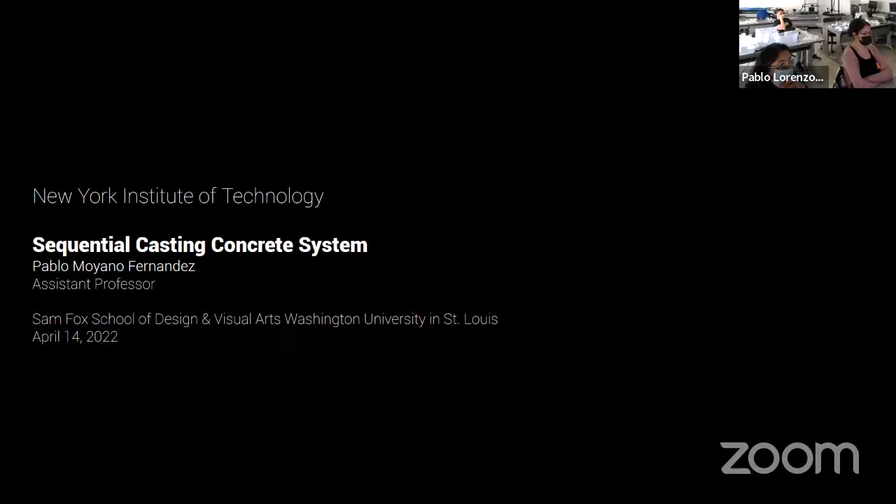We'll discuss that later, but thank you for being with us, and the floor is yours. Great, well, thank you, Pablo, for such a long introduction. Well, I'm very happy to be here. I'm very excited to share my work.

Well, as Pablo already mentioned, I am very fascinated by concrete. It's the focus of my research.

The idea of this lecture, given the time we have, is to show you what I've been working on during the last year. It's only one research project, but it has multiple applications in my opinion. Hopefully you guys enjoy the presentation.

What you see on the screen is the Performative Concrete Hub. This is a website I recently developed, a platform that consolidates my teaching and research. It's a dissemination tool that showcases applications and possibilities of concrete as a versatile construction material in experimental but also real projects. The matrix on the screen represents the inextricable connection between my research, my practice, and my teaching.

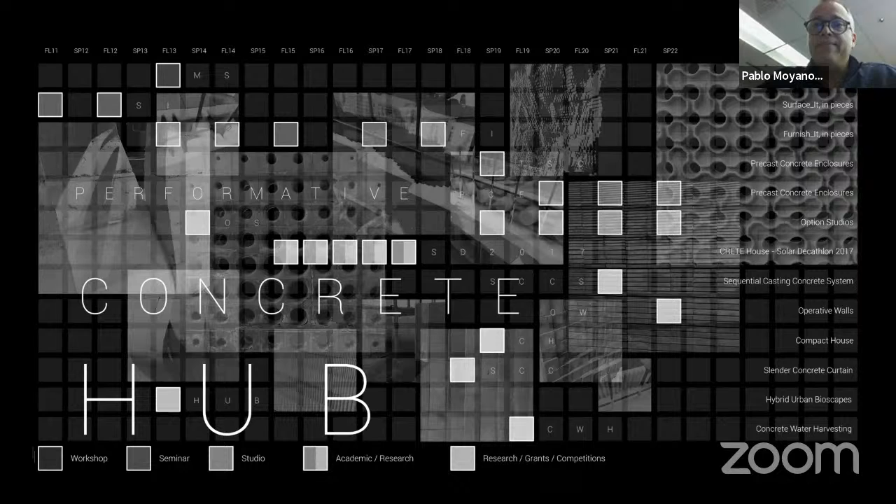In the last century, building technology has witnessed increased innovation in materials and assembly methods. With the emergence of digital fabrication technologies, architecture as a discipline, and the whole construction industry in general, has greatly broadened its options in terms of the materialization of building assemblies. The availability of a robust digital platform provides designers with a new set of tools that can enhance their creativity and potentially increase the complexity of building components.

All this is really exciting. Now, while digital fabrication tools can offer appealing construction methods, those methods usually rely on labor-intensive processes to set up the equipment, assemble components, and finish the final pieces. Consequently, there is usually a wide gap between the assemblage process required by digital technologies and the methodologies effectively adopted by the building industry.

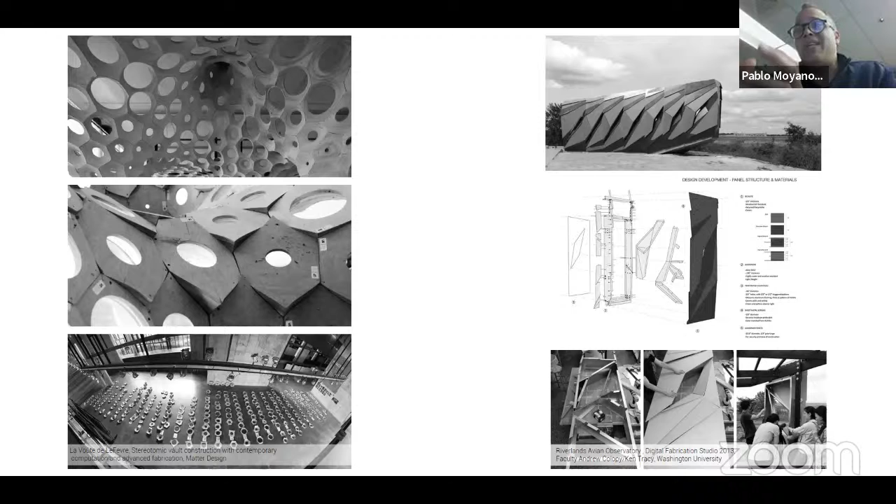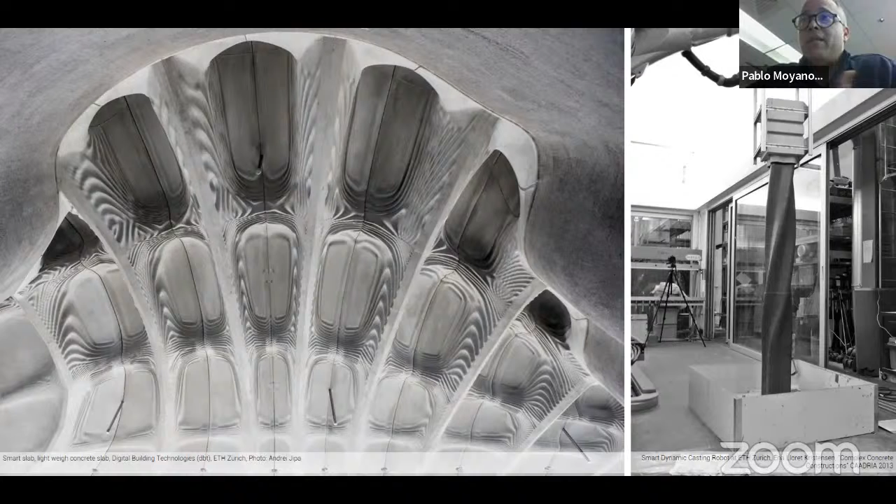However, in the case of concrete, there is fertile ground for exploration in terms of digital technologies applicable to formwork making, and its impact on casting methods. Concrete's reliance on formwork, due to the unique property of the material changing state from fluid to solid, brings the idea of a mold really to the forefront of the possibilities this material offers. And this is precisely where the focus of my research is.

I have been testing methods to integrate new technologies into the production of formwork making techniques. I am particularly interested in exploring the performative qualities of concrete in building envelope systems using innovative methods of fabrication connected to material innovation, in particular in concrete.

Concrete, as we all know, is a widespread material worldwide. It is used in countless applications and is specifically prominent in building structures and infrastructure projects such as highways, bridges, and many other large-scale projects.

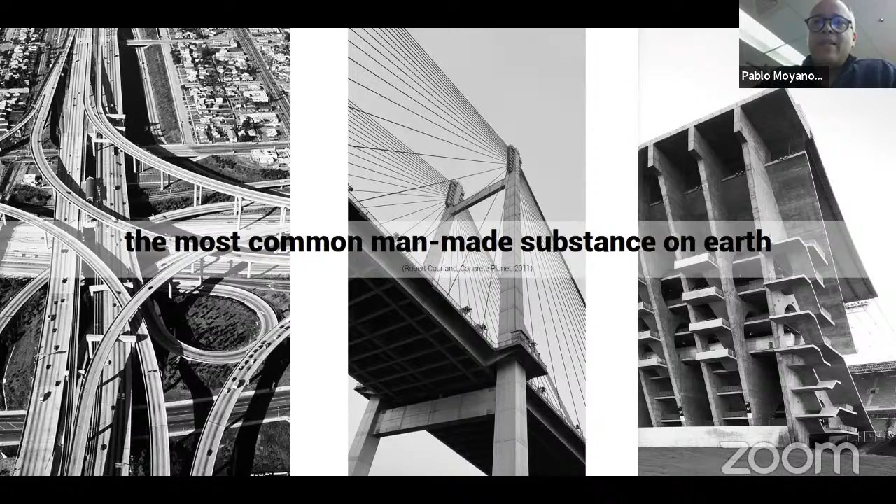Now, concrete's intrinsic properties, when coupled with new advancements in material capabilities, have increasingly enabled the use of that material in building envelopes.

Concrete is considered by some historians one of the oldest building materials. As you know, it was frequently used by the Romans many years ago. The Dome of the Pantheon, built more than 2,000 years ago, is an eloquent testimony of the architectural possibilities, as well as reliable evidence of the longevity and strength of the material.

However, somehow after the fall of the Roman Empire, the material virtually vanished. Two French theorists, Rondelet and Bourgain, in their construction treatises in the early 1800s, describe the methods used by the Romans and question why modern architects would neglect the use of such a cheap and efficient system as concrete offered back then.

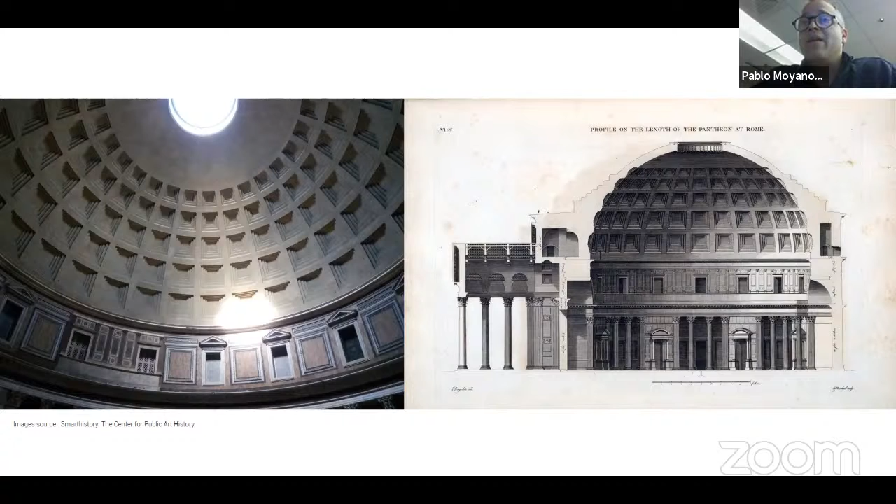When concrete came back into use as a building material, it evolved from a rather humble origin called pisé construction. Although the use of mud dates back to original civilizations, the technique was extensively used in Spain since Roman times, but also in France in the Lyon area in the 1700s.

The system consisted of ramming packed earth between movable formwork. The formwork consisted of a parallel set of boards which slid between vertical posts. The boards were raised once the earth was compacted and the process repeated.

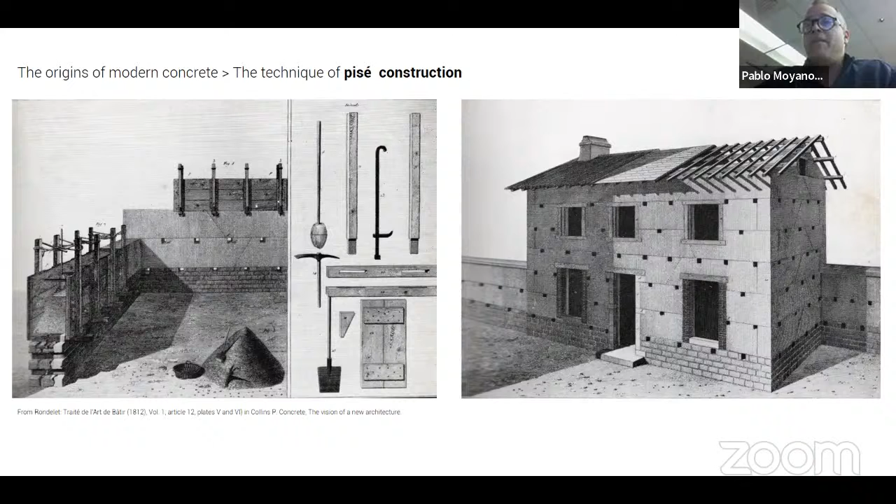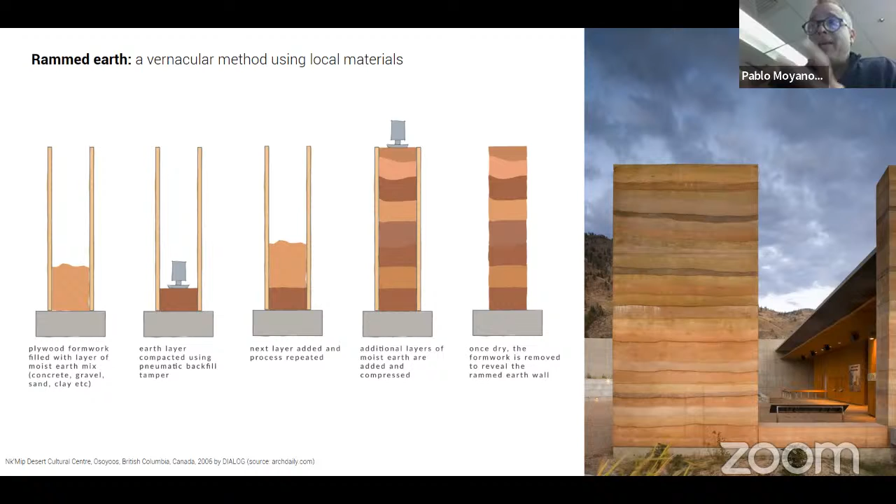Rammed earth is one of the oldest construction techniques done by civilization. Making rammed earth involves compacting a damp mixture of soil with suitable proportions of sand, gravel, clay, and some stabilizers into a formwork. Historically, additives such as lime or even animal blood were used to stabilize the mix and make it more cohesive. By using local materials, buildings can establish a strong connection with their environment, in addition to minimizing transportation and the use of outside resources.

The importance of pisé in the development of concrete construction lies not so much in the material used, but most importantly in the technique. The peculiarity of pisé construction is based not only in the economy of using earth as a building material, but in the process by which a building is literally molded into its final shape.

So this very primitive construction method had revolutionary implications in the future of concrete as a building material, as we will see.

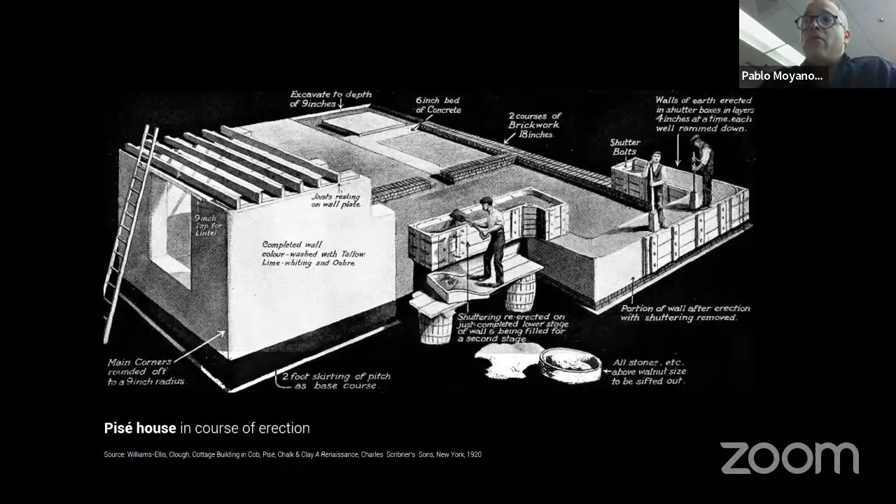Thomas Edison, as you probably all know, was an American inventor, but he was also a businessman. He developed many devices in fields such as electric power generation, mass communication, sound recording, motion picture, and many more.

These inventions, which include the phonograph, the motion picture camera, and early versions of the light bulb, have widespread impact in the modern industrialized world.

But behind all these successes, there have been also some failures. In 1908, Edison filed a patent about a home that could be built using a single pour of concrete, a single cast.

Edison had prior ventures in concrete, so he was very familiar with the material, including a cement plant in New Jersey, near where you guys are. And he had patented several improvements using concrete.

Everything means foundations, walls, floors, ceilings, even staircases, even partitions, bathtubs. Everything was cast in a single cast to make the entire house.

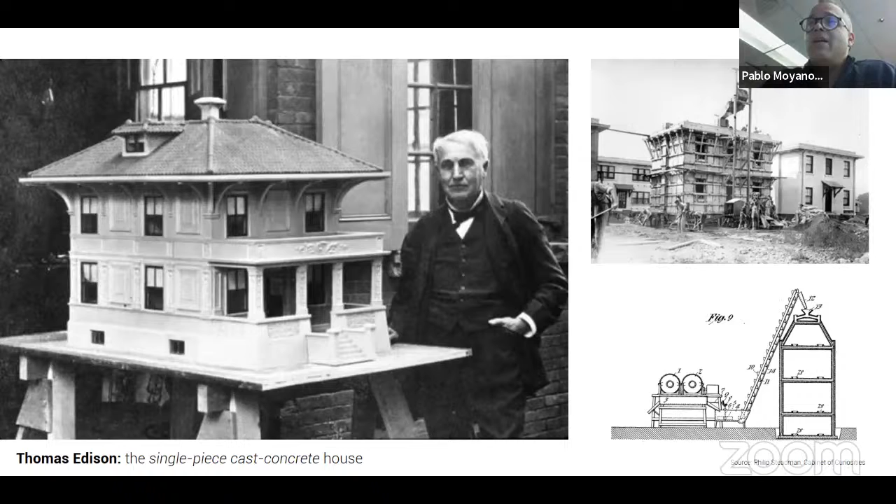But to me, it shows a very interesting precedent that intends to take advantage of the fluid state of the material into something that then becomes very robust. So that was kind of the inspiration here.

So the Pisé system evolved through time. The most obvious improvement was the increase of cohesion between earth mixing with a stronger binder. Many experiments were done, but ultimately that led to the modern concrete.

François Cointeraux was a French architect. He was one of the first ones to use the system more extensively in chapels and other buildings in the Lyon area. The latest version of this technique is called slip form, also called jump form.

This is a method of construction in which concrete is poured into the top of a continuously moving formwork. As the concrete is poured, the formwork is raised vertically at a speed which allows the concrete to cure before it is freed from the formwork below.

This is the fastest method of construction today for reinforced concrete structures. However, it is economical only for tall buildings. We're talking about 10 stories or higher.

10 stories or higher. It's very common in building cores, bridges, silos, water towers, and very, very large scale projects. But it's not really feasible for small scale structures, primarily because of the high setup initial cost.

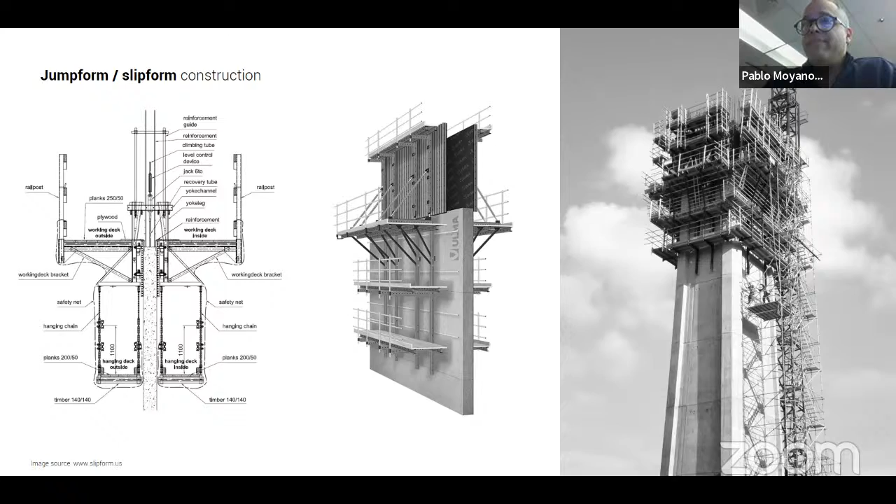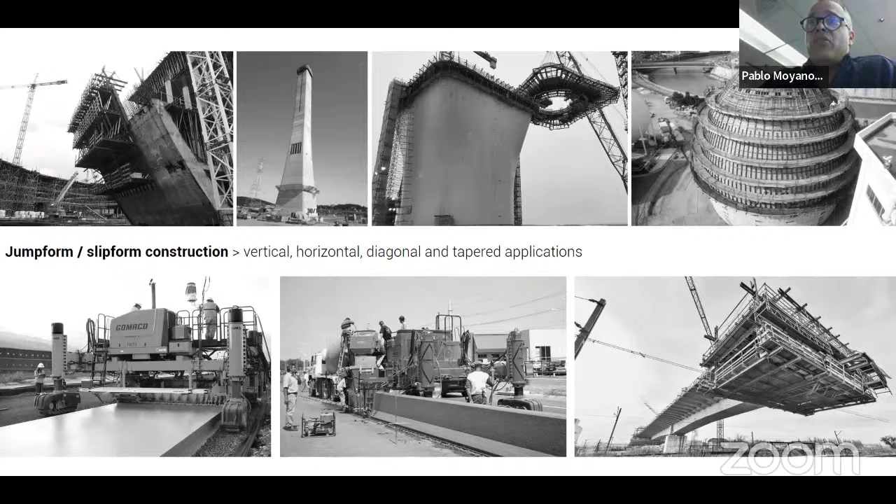The system can also be used horizontally, like highways. You've probably seen this when you drive around, but also in bridges, also incline, even taper structures can be built this way. And even complex geometries can also be achieved using the same system.

Now, concrete has inspired a number of artists and designers across the world. Rachel Whiteread is a very prominent British sculptor of her generation.

She actually casts the spaces inside and around objects. The resulting sculptures are remarkably faithful to the source, but also strangely foreign because they represent the inverse of the original.

In her work, absence is made present, interior becomes exterior, and the invisible becomes visible.

It's interesting because it's exactly the opposite of Edison's approach, right? So instead of casting the house, she's casting inside the house and getting the opposite.

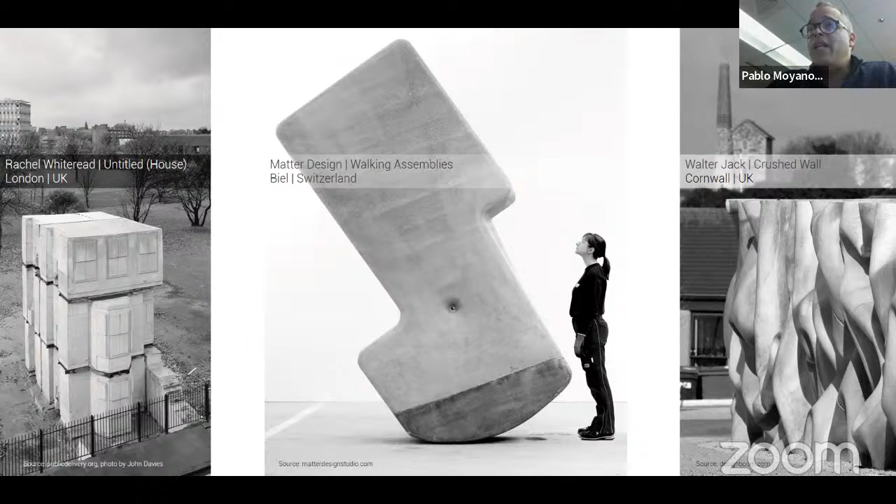Crushed Wall, the image on the right by Walter Jack, is an expansive 40-meter long, 3-meter high wall. The project is about geology because it's a retaining wall, but it's also about process. The artist, Walter Jack, is interested in how things are made. We typically register concrete as a hard material, not noted for fluidity and softness, and yet concrete is a liquid. So here the intention is to retain the liquidness of its process.

For the last year, as I mentioned, I've been working on sequential casting concrete. This is a construction method inspired by two conditions: on one hand, the unique state change property of concrete from fluid to solid, but also the idea of formwork—not necessarily as a static entity, but as a dynamic entity. That's where my research is interested. It really challenges conventional mold making, trying to produce, in this case, load-bearing building enclosures.

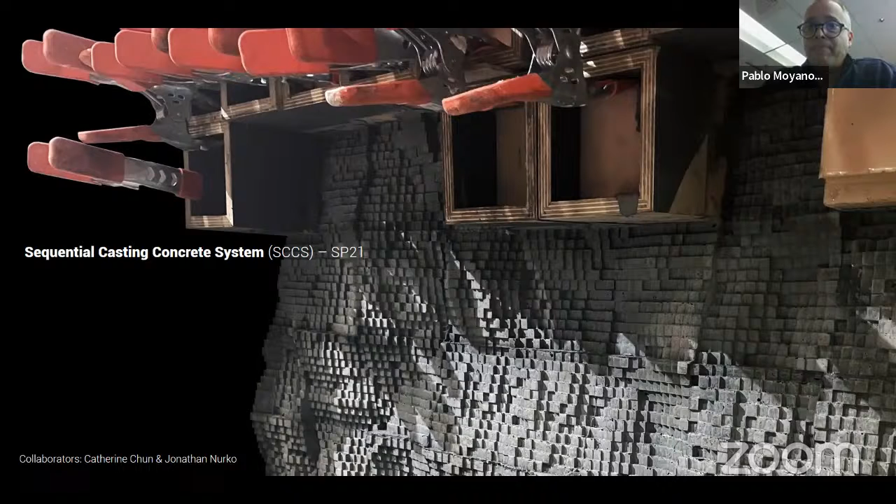In order to explain this, I'm going to quickly revisit how the wall as an architectural element has evolved over time. Historically, bearing walls have been the primary structural components for buildings. During the Neolithic age, construction of shelters experienced a radical shift from large animal bones into load-bearing masonry employing manufactured materials such as puddled mud or mud bricks. Load-bearing masonry continued to serve as the most fundamental structural element for secular and religious buildings until the 19th century. However, in contemporary architecture, the separation of structural frames from non-structural enclosures became the predominant trend.

Today, most building envelopes rely on cladding systems such as rain screens, curtain walls, or barrier systems that are completely independent from the structure. On the other hand, building structures during the 20th century responded primarily to rectilinear industrialized products such as steel sections, lumber, and plywood. Therefore, contemporary load-bearing walls are usually single flat vertical surfaces made primarily of masonry, bricks or CMU, wood, or concrete. Those are the main materials for load-bearing walls.

The sequential casting concrete system is a proposed casting methodology based, as I mentioned earlier, on slip forming, but the system hybridizes vernacular methods of adobe construction with cutting-edge technologies and materials. It delivers load-bearing enclosures that integrate structure and skin, can include highly customizable geometries simple to fabricate by non-skilled labor. They're also efficient and resilient. So the proposed system fits right in between ancient construction techniques and modern cladding systems, capitalizing on the advantages of load-bearing wall assemblies.

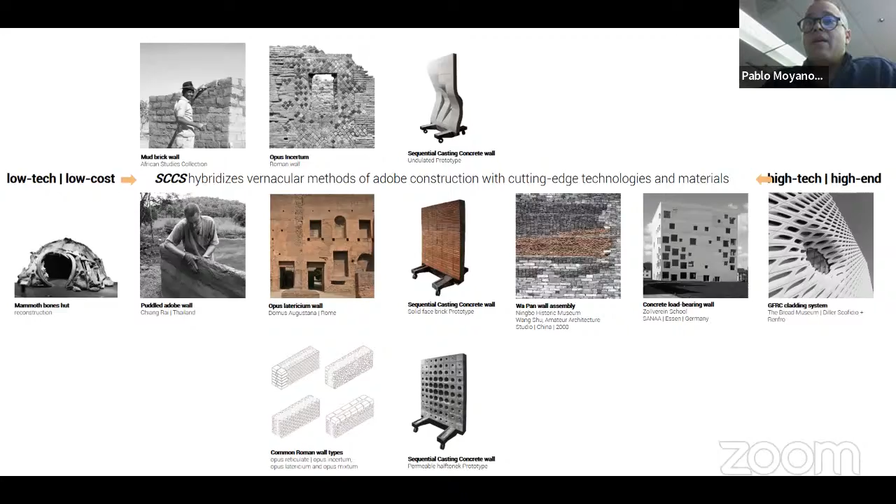The system offers highly articulated profiles that allow complex geometries, including a wide range of finishes and textures, while incorporating the latest concrete technologies—using ultra-high performance concrete, a fairly new material developed in the last decade and a half. The system provides durable concrete structures that rely on the use of a series of small and economic molds, which can be either handmade or 3D printed. It is simple and can be executed by unskilled labor.

The sequential casting system capitalizes on the plasticity of ultra-high performance concrete to produce intricate geometries, and its very high compressive and tensile strength allows a drastic reduction of the overall thickness, material usage, and actual weight of the structure. As a result, the wall is free from limitation in its geometry and materialization using a simple, low-cost concrete construction system.

As a proof of concept, I built 8 mock-ups fabricated using mostly standard desktop 3D printers for the molds, but also some conventional wood frames made with interchangeable urethane rubber inserts. The work was partially funded by a creative activity research grant from Washington University, and it has been condensed into a paper called Sequential Casting Concrete Systems in Load-Bearing Concrete Enclosures, published last year in the Advanced Building Skins Conference proceedings as part of the session New Forms of Concrete in Bern, Switzerland.

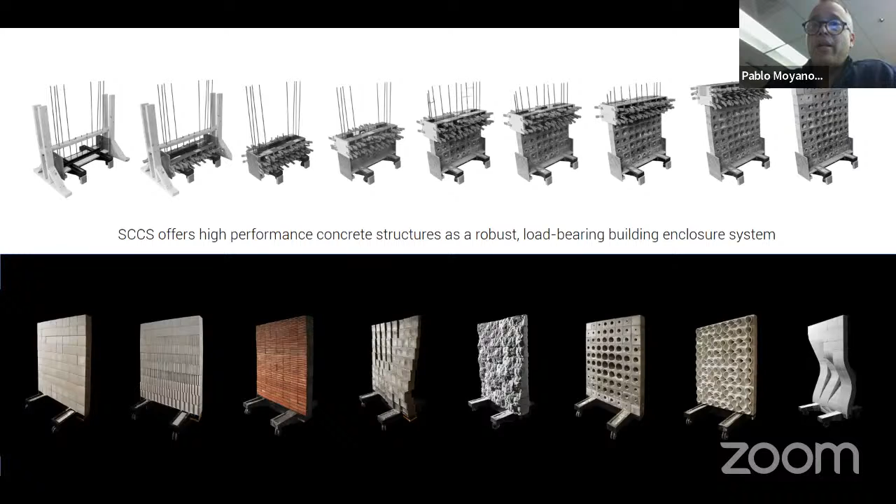I'm going to show you now some of the mock-ups I made, some drawings that showcase how the system works. This is the simplest one—as you can see on the right, it's just a flat wall. It was built using, as you can see in the center of the drawing, these plywood frames. Then a rubber insert is placed in between, and you create rows, then cast the concrete sequentially. I'm going to introduce first some of the prototypes, and then I'll go into more detail about how it's built.

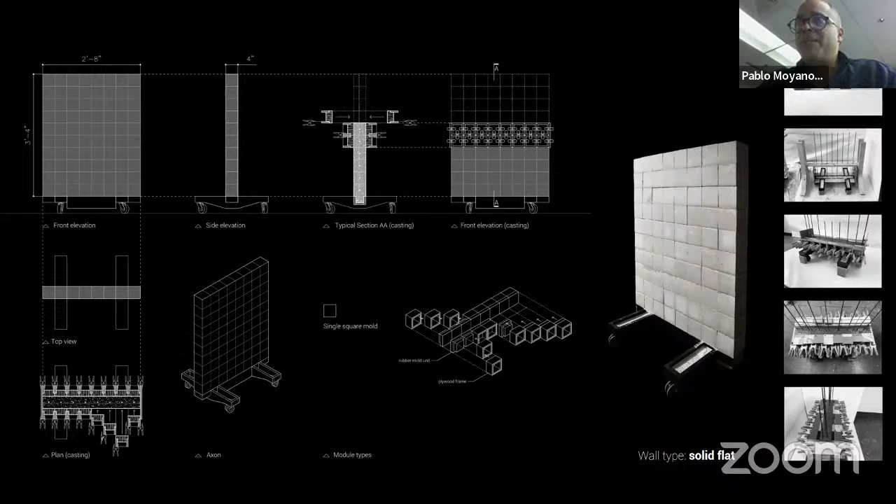Since the system consisted of small-scale molds, is it possible to incorporate gradual shifts by displacing the units to produce an irregular layout? This offers a possibility of constructing relatively complex bearing walls with articulated surfaces. In this case, the thickness of the wall is kind of the limitation of the shift.

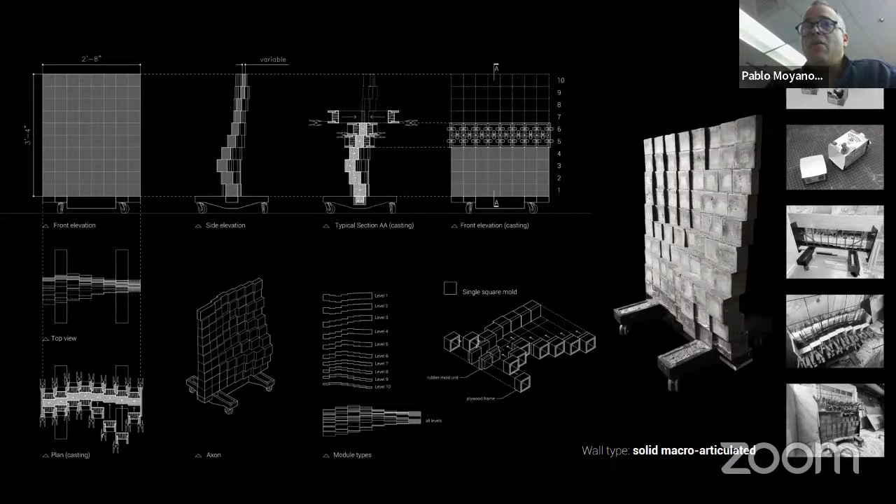The thicker the wall, the more shifts you can create, but definitely the system allows for that. As you can see on the top section, the system allows tapering walls, so you can decide the thickness of the wall as you go up. In this case, I'm following gravity, making it thicker at the bottom and thinner at the top, but that can be challenged and changed.

In this case, I'm using the same wood frames, but changing the urethane rubber molds from a flat one to one that is pixelated. I have 5 of them, 5 different pixelations. By rotating them and mixing them as you go up, you can build a fairly micro-articulated surface.

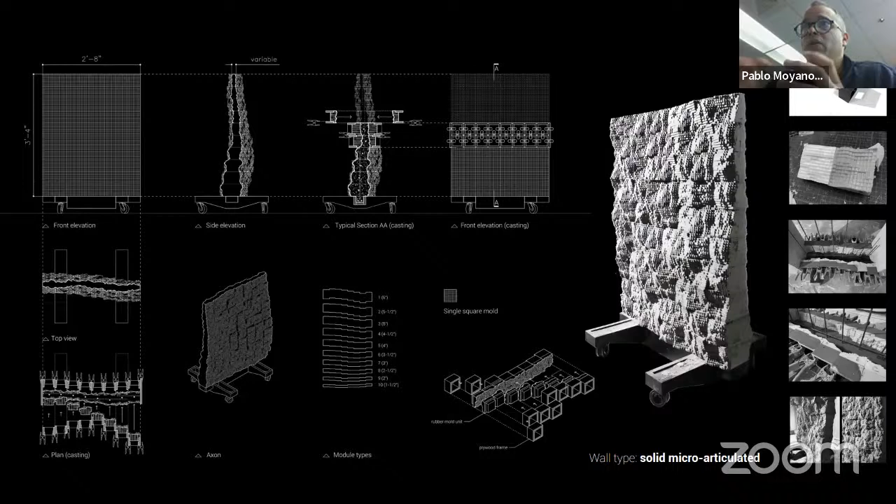In this case, the inserts were done with 3D print molds. Each of the molds you see there are 4 by 4 inches, fairly small. I use only desktop 3D printers, very cheap—you can buy one for $200 or less. The whole idea of the system is to make it as available as possible, so anybody with access to a 3D printer can build this. And the wood frames can be done by anybody familiar with using wood.

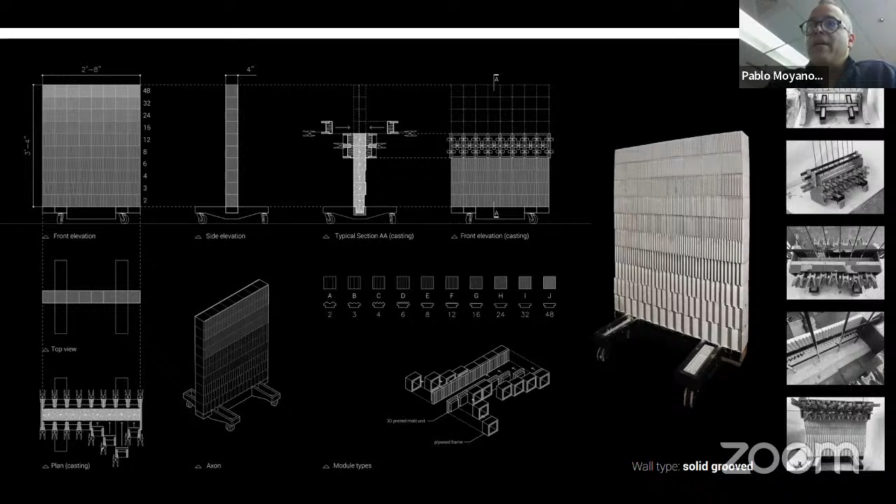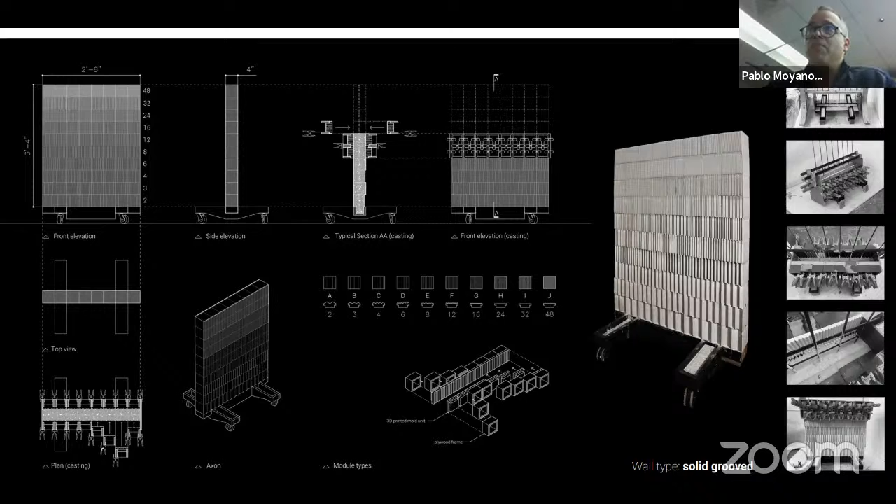In this case, I created a gradient. You can change the arrangement of the units, but the idea of grooving can provide not just aesthetic to the wall, but also potentially serve as a self-shading device, creating a surface that acts as a geometric actuator for thermal flows. Carefully, based on the orientation and the place where you are, you can design a system that is more efficient in terms of solar radiation control.

The system also allows for integration of other materials, so it doesn't have to look like concrete. In this case, I'm adding bricks. I'll explain this better later, but this is something common in the precast industry—they use what's called face bricks. They lay them into a form liner, cast concrete in a flat bed, then tilt it up, and you have the wall with bricks. It's a technique used in the precast industry.

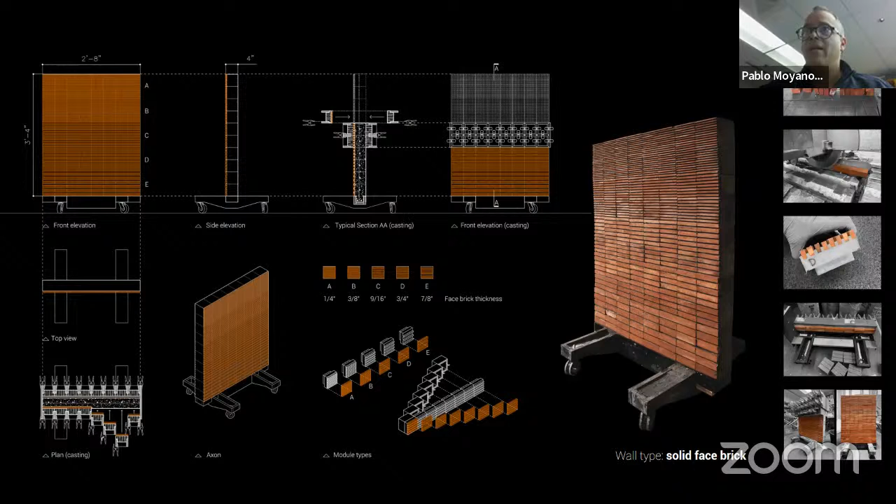But in this case, what I'm proposing is using recycled bricks. You can cut them very easily with a tile cutter and create these kinds of structures. I'll explain this a bit better in a couple of slides.

The system also allows for permeable walls. This is inspired by the half-tone reprographic technique, basically a matrix of dots with different sizes and spacing, which allows monochromatic printers to simulate tonal variation from a photograph or an image. That's a kind of old technique today—that's how newspapers used to be printed.

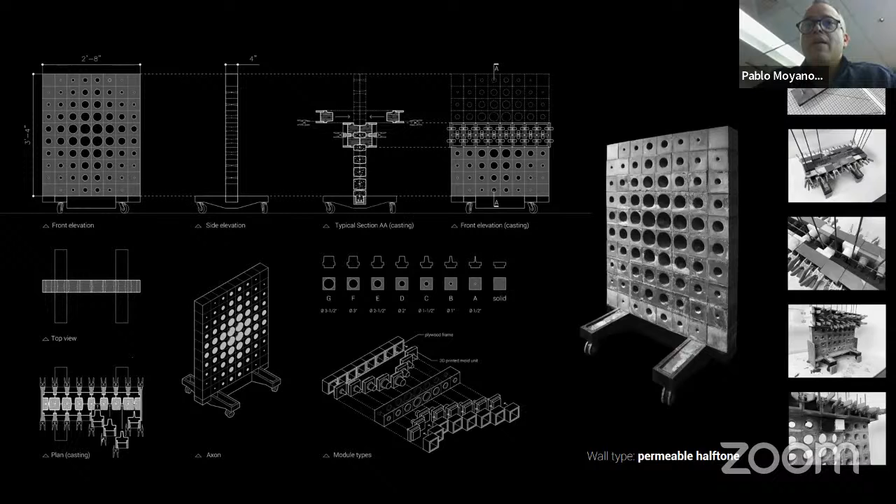This one is inspired by a game I saw called Kanoodle. It's basically a game that consists of little balls connected, forming different pre-assembled shapes, used to fill predetermined areas of a board. In this case, using the system, you only have 6 different molds. You can rearrange them in different ways and create this maze-like configuration.

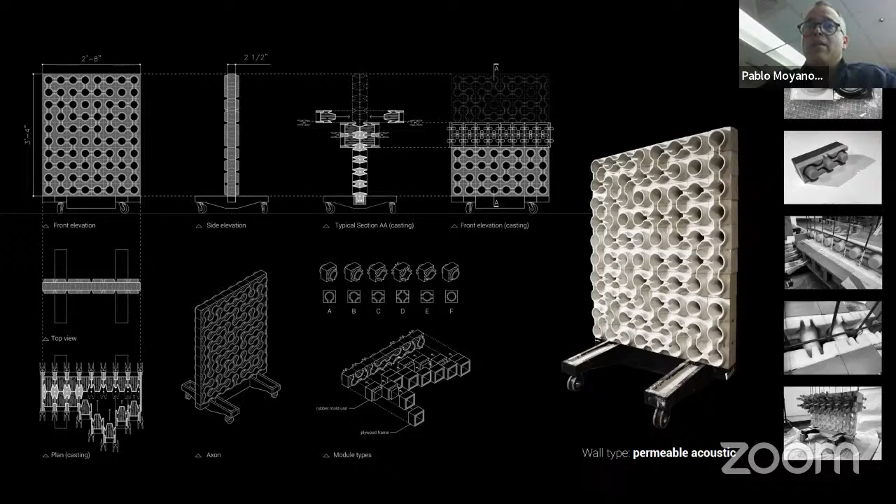Not only can the wall be permeable like this one with through holes, but they can also be solid—it depends on how you make the mold. The idea of acoustic properties, I think, kind of emerged from this type of mold.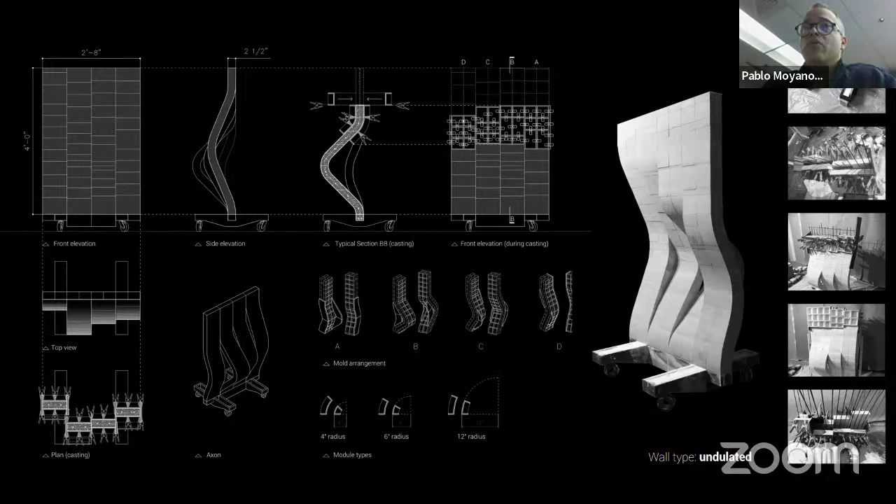So a little bit about, I'm going to show in more detail a couple of the options. So one thing that I'm very, very interested in about the system is the application in low income and low resources communities. So the first test that I made was this one, using, as you can see on the screen, literally I used milk containers to create the molds.

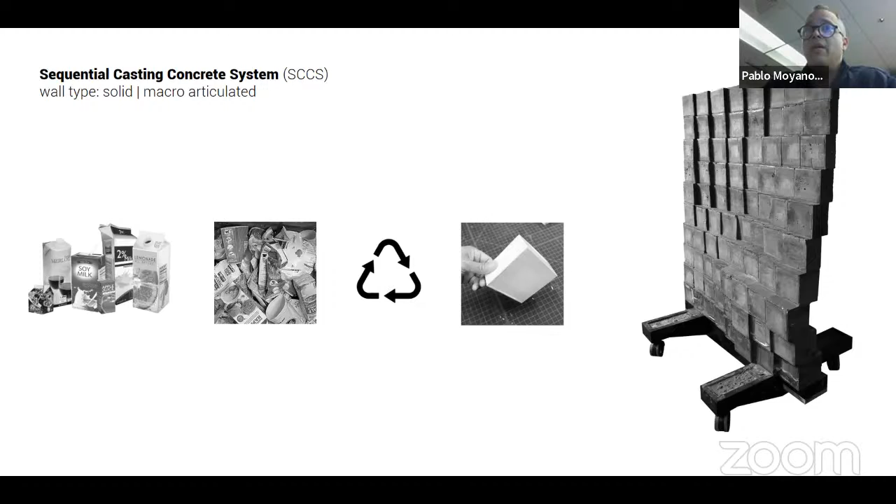So basically, I took the bottom of the milk container, which are roughly 4 by 4 inches, and then used the remaining part of the container to do like a second layer in order to make it a little stiffer and stronger, and then create these little boxes. They are, of course, very simple to do. Now, what is interesting about this is because it's a milk container, the material is, of course, impermeable. So the hydrophobic nature of the material works very well in contact with wet concrete. So it allows a very easy mold release while supporting multiple casts with no deterioration of the mold.

I'm using also very cheap clamps. You can buy them online or in a store for less than $1 a piece. One thing about the system is because it's done sequentially, as you can see on the screen, you have to do layer by layer. So because of that, you can actually use very cheap and not super strong clamps because the amount of concrete that you pour is only, in this case, 4 inches tall. So it's not a lot of pressure.

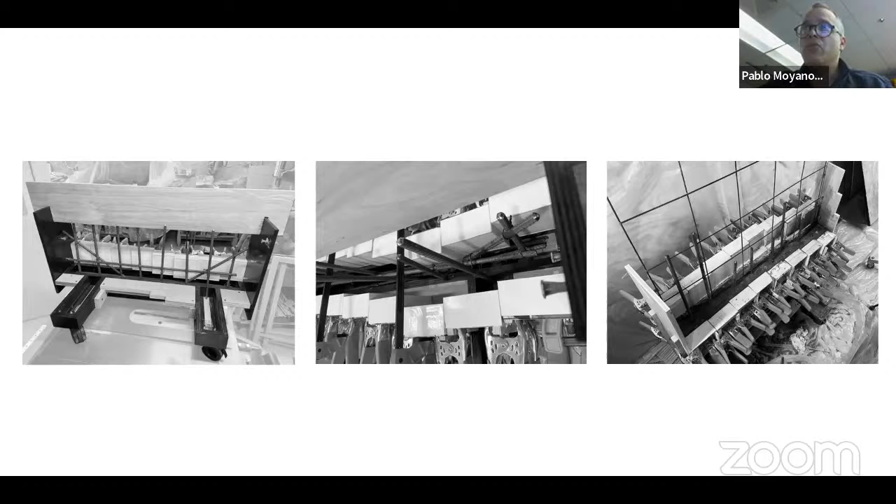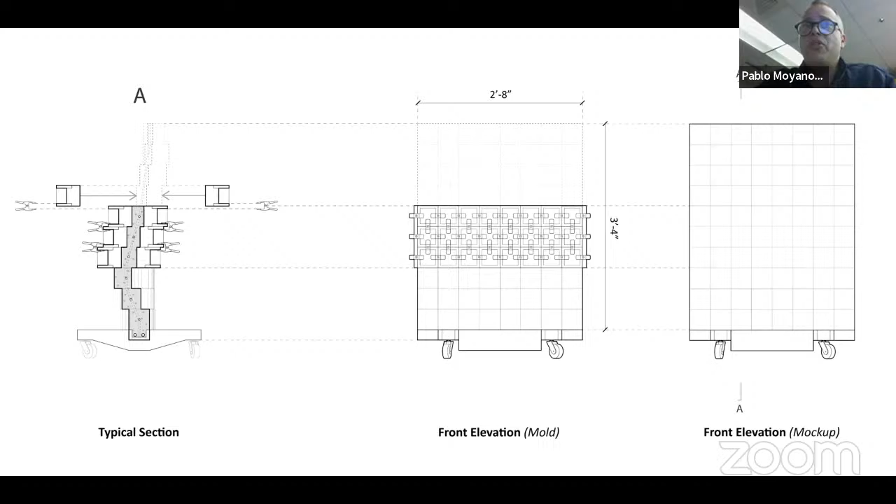So the hydrostatic pressure is usually a problem in formwork for concrete. You need very strong molds. But in this case, because it's done sequentially, the pressure is much, much lower. So with simple clamps, you can actually make the system work. And then, of course, as you can see, you can keep going up. I mentioned earlier, as you can see on the left, the thickness of the wall can be changed, can be tapered, or can also vary all the time, depending on the design. And then, as you can see there, you can create these kind of articulated walls.

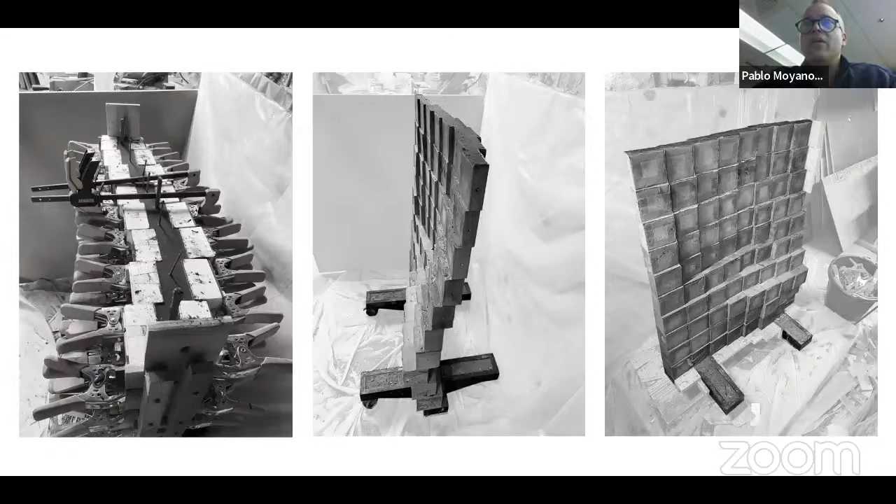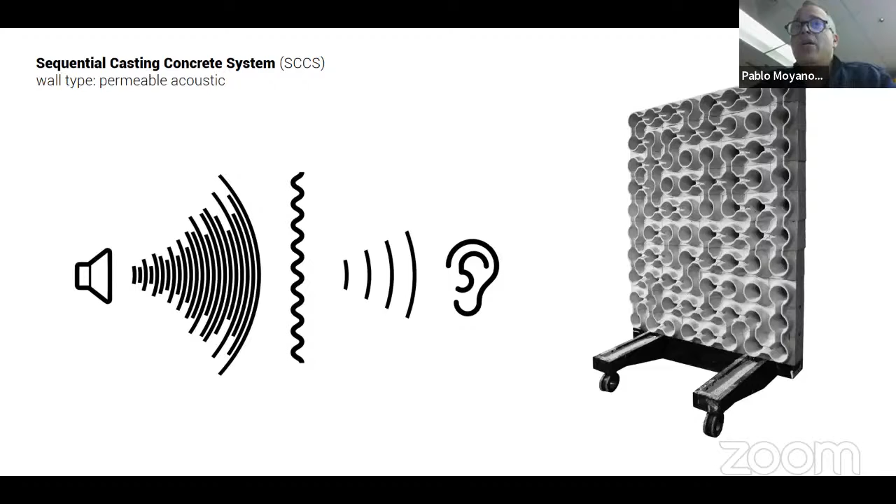Concrete is a material that already has excellent acoustic properties that mitigate reverberation of the sound waves. If on top of that, we shape it into certain geometries, we can create walls that are very effective noise buffers. And that's what I did with this prototype. So in this case, what I did is create the molds that you see on the left, CNC'd from a CNC machine that we have here. And then I paint those molds, sand them very well, and then cast rubber.

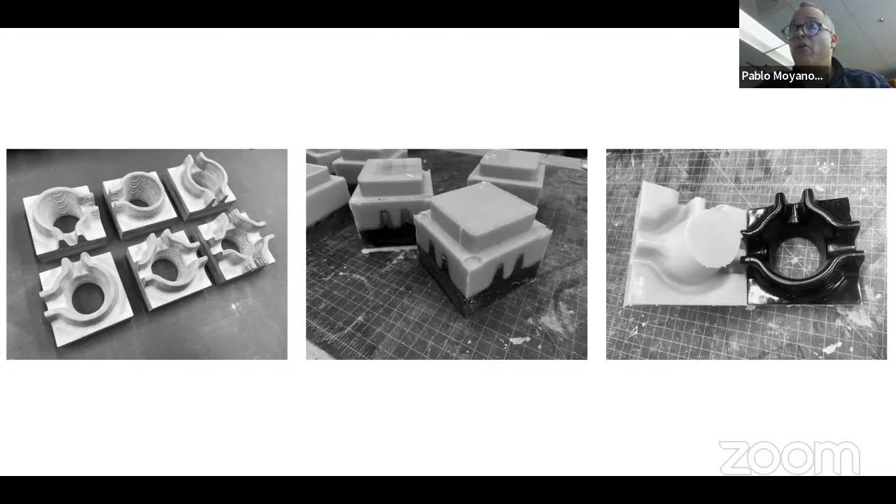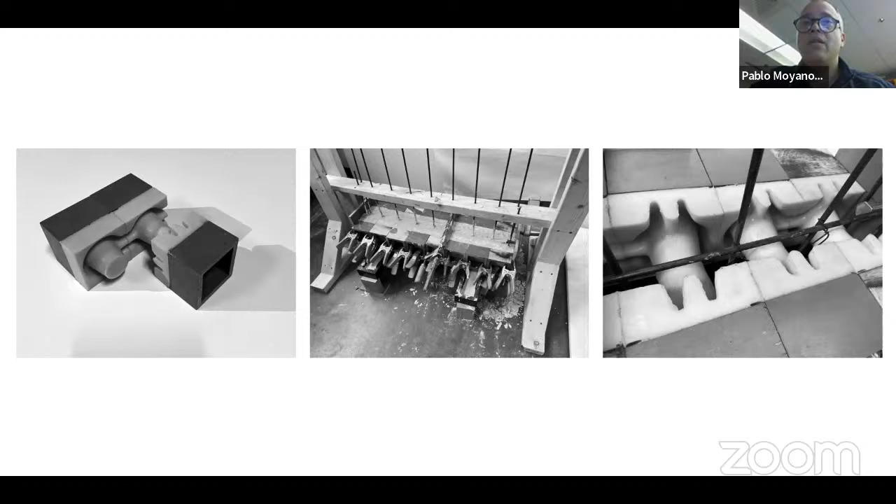I use that rubber mold, as you see in the middle and on the right, for the formwork. The rubber is urethane rubber, it's very strong. You can do literally thousands of casts without deterioration of the mold. So it can be used many, many times. To obtain the voids, in this case, you have these inserts in the rubber, and then you can create actual full penetrations. Of course, you can decide not to do that and have a solid wall as opposed to a permeable one. But in this case, I just did it with the permeable option. And then, as you can see in the section, you have all those voids.

The one important thing about everything that I'm showing you right now is the concrete type that I use. So this is not conventional concrete. I'm using ultra high performance concrete. This particular material has the properties of being 4 to 5 times stronger in compression than traditional concrete. To give an idea, traditional concrete is around 4,000, 5,000 PSI, meaning 5,000 pounds per square inch. That's how much pressure they can resist in compression.

The material that I'm using is around 20,000 to 25,000 PSI. So it's 4 to 5 times stronger in compressive strength. And it also has much, much higher tensile strength, and concrete, you know, is not very strong in tension. This material, because I'm also adding some fibers, also has very high tensile properties.

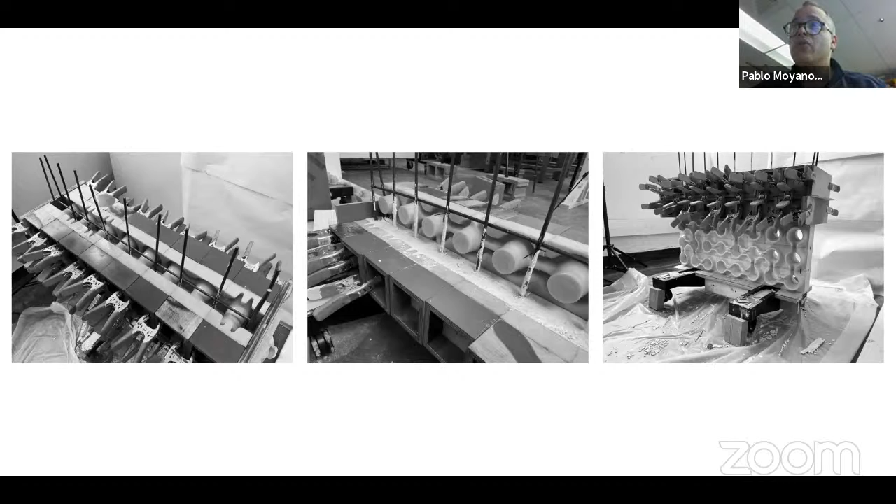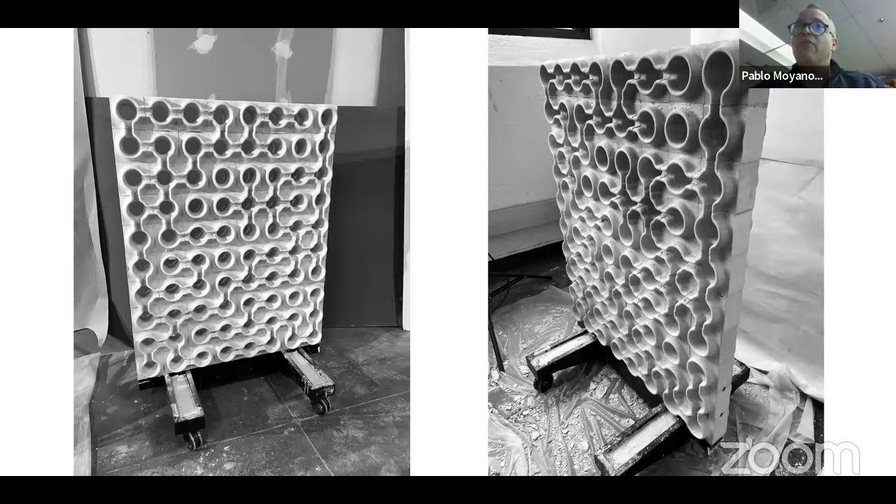Not only that, but also the way this material works, I'm using special plasticizers to make the mix much more fluid. So therefore, it allows for fairly complex molds like this one to be filled in a single cast without vibration at all. So I'm not vibrating anything. I'm just casting. It almost looks like a pancake mix. It's super, super liquid. You can literally pour it into the mold, and then it's self-consolidating. It completely fills all the gaps, and you can create fairly complex shapes without need of vibration.

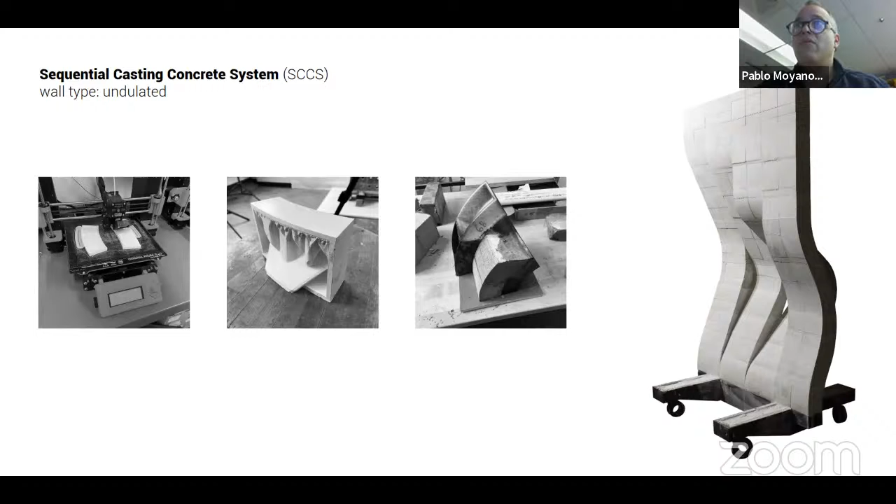This one, as I mentioned earlier, is only done with 3D printed molds, as you can see. I created a series of curves and straight pieces. The system also is very important because it allows reinforcing. So as you can see, all the mockups that I made have steel rebars in them. So that way you can create a system that is truly load bearing, so it can have structural properties.

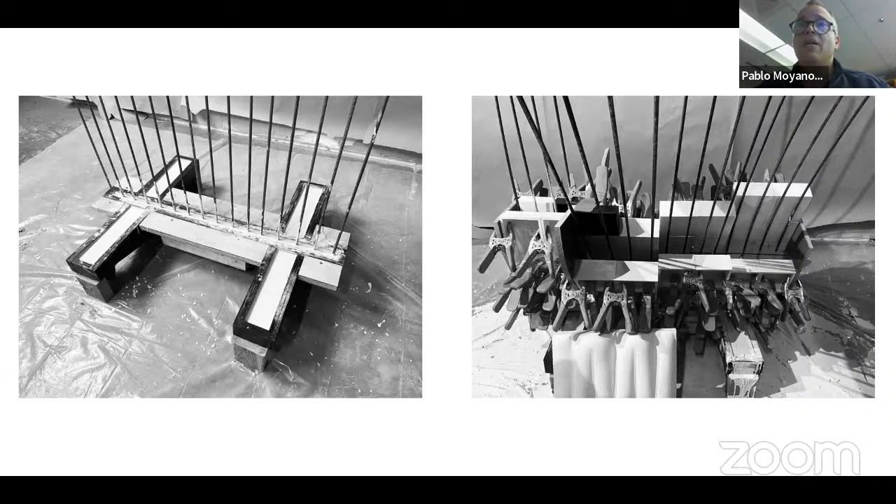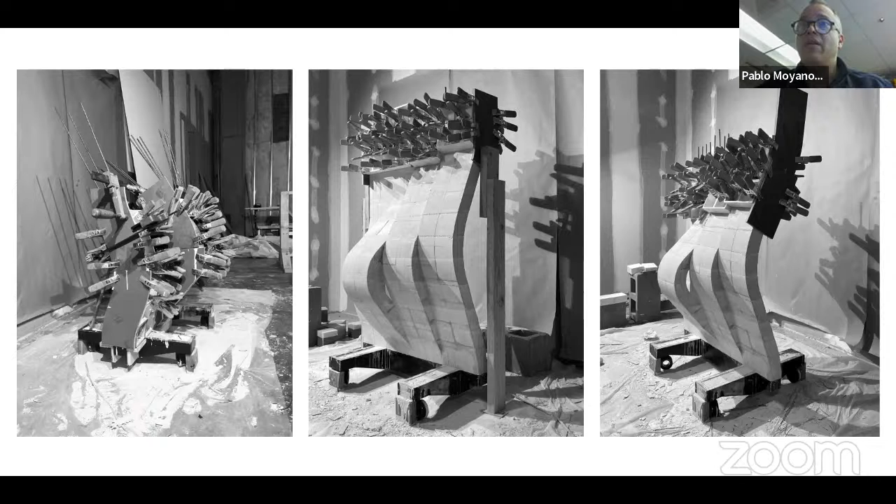So in this case, this example that you see on the screen is only 2 inches thick. I could have done that even thinner, but because it was the first one, I wanted to be a little safe and make it a little thicker. But the material allows for a drastic reduction of the thickness, maintaining the structural integrity. And well, that's why you see all the reinforcing. In this case, I'm using white cement, so you get a white wall, but it can be done with traditional gray.

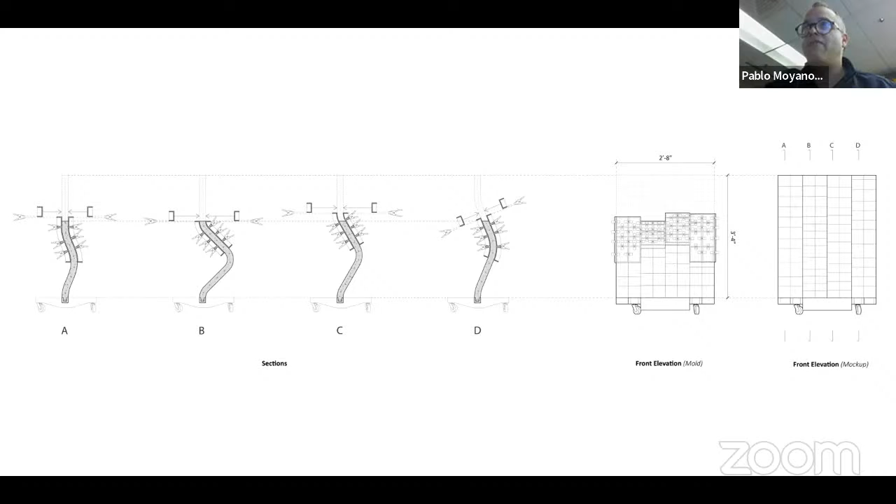As you can see here, you have, in this case, 4 different strips, but 3 different curves I use to get those curves.

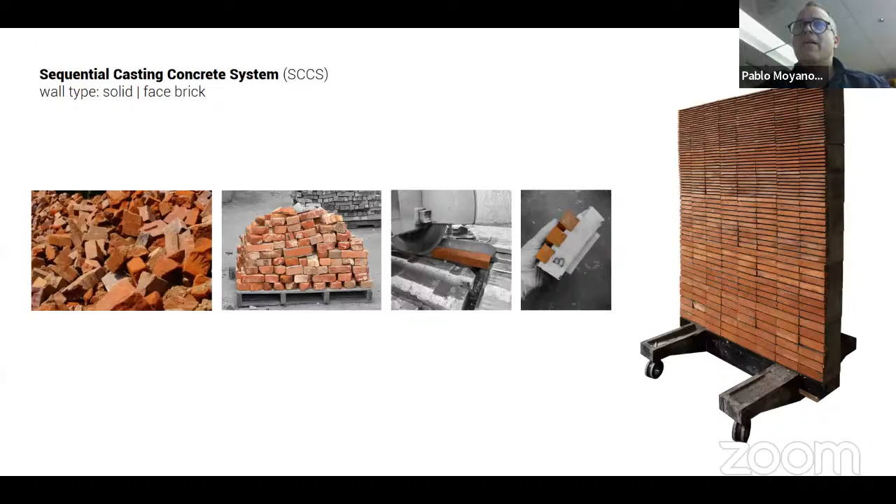And this one is the one with bricks. So the idea of this one is, again, as I mentioned earlier, to use recycled bricks that can be debris or any leftover from older buildings or demolitions. What I'm proposing is, in this case, a tile cutter, which is not a super expensive tool. You can cut the brick very easily. It's a fairly soft material. In this case, what I'm doing is creating these rubber form liners that have these grooves. So the pieces of brick can be inserted into these rubber molds and held in place, and then you cast the concrete.

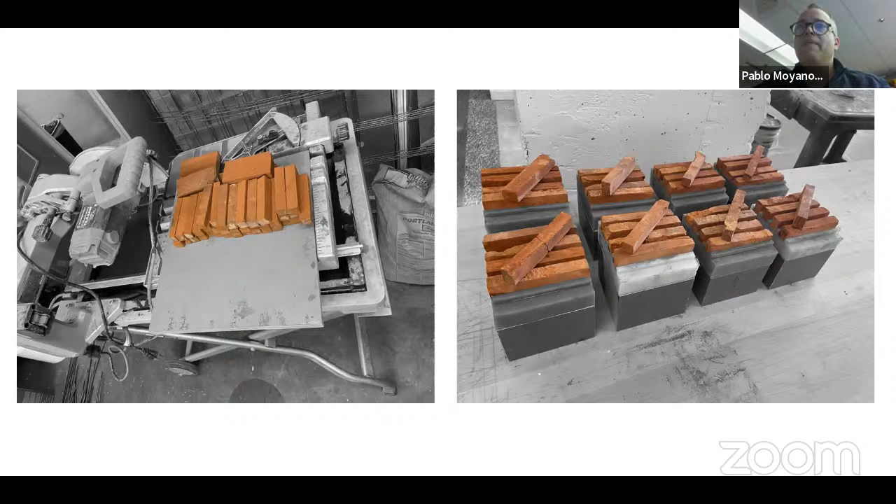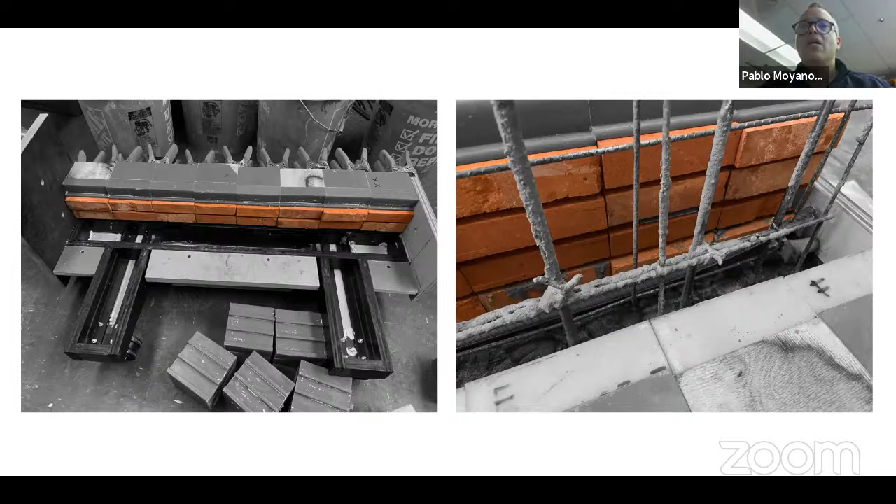As you can see on this image, I'm showing on the left only one side, but on the right you see both sides. So you can hold the bricks in place with these form liners and then cast the concrete. You can also, of course, reinforce, and then you can create a very strong structure that also has all these brick faces. I'm creating this pattern, again, like a gradient, but you can, of course, do any pattern you like. You can use different color bricks. You can also use other materials, not just brick. But this is just showing brick as a more traditional way of masonry construction.

And just to finish, I'm going to show you one project that I just finished developing. It's not built, but I plan to build it this summer. So this wall system that I'm showing here is called operative walls. It utilizes the sequential casting concrete system principles applied to, in this case, a real intervention in a residential backyard in St. Louis, here where I am. So it combines the undulated prototype with the face brick prototype that we just saw in the prior slides.

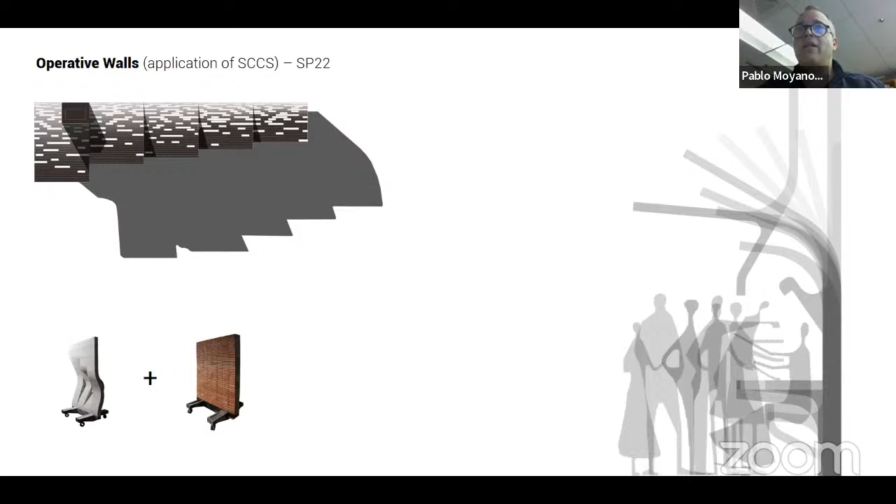So I am basically proposing 5 segmented walls that replace an existing wooden fence. These walls provide an active enclosure and a physical boundary for safety and privacy. But the walls, as you can see, are designed with a geometry that can result in a series of canopies, protecting from the weather while activating the surface with different uses. For example, a bench, herb planter, a countertop surface, also storage.

And even on the right, you can see an integrated grill system called parrilla in Argentina, the country where I'm from, very, very common. So the idea is to incorporate that into the wall. And then it has a chimney, so you can properly burn coal, charcoal, or wood for cooking.

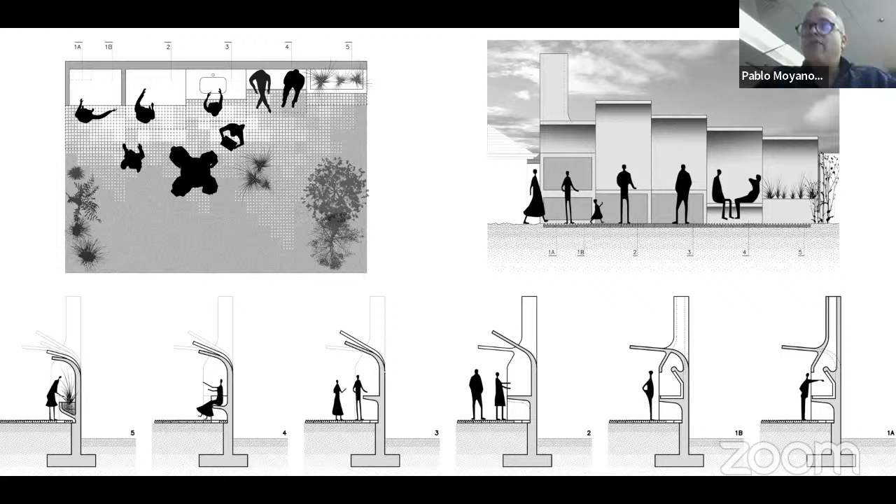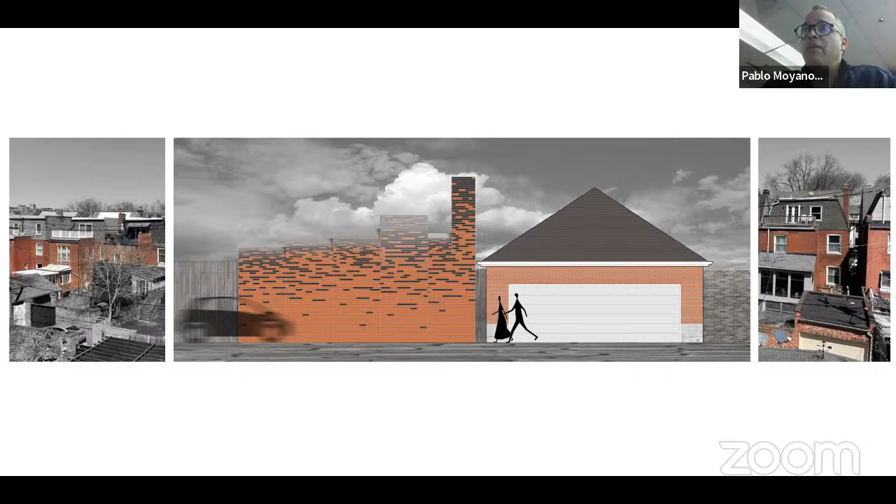Now, the idea in this case is mixing 2 materials, brick, but also slate, which is the predominant construction material in the context of this project. So that way I establish a visual integration between the context and the proposed project. So basically I'm using bricks, but also slate, or even asphalt shingles, which is a very, very common material here in St. Louis. It's cheap and it's very durable. So you can actually use asphalt shingles, in this case, combined with bricks to create that kind of visual integration.

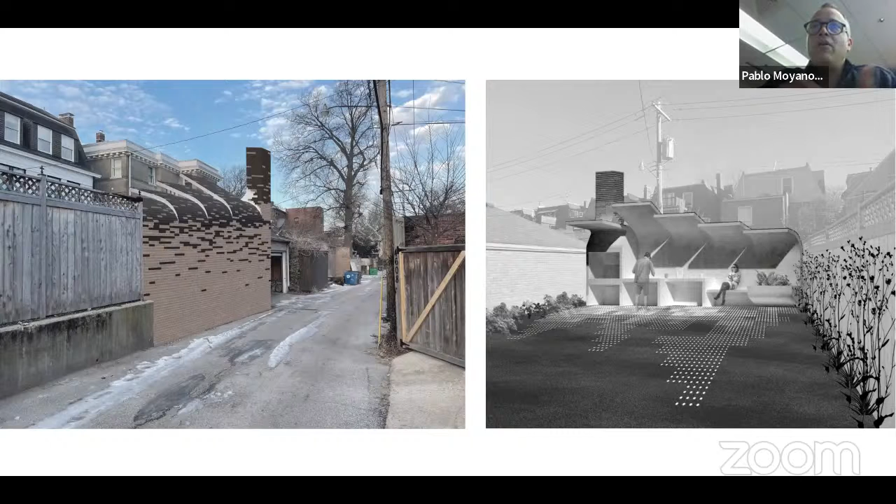And then a couple of renderings showing how it would look like. So it's an alley, so it's not a very pretty street, but it's a condition there. So the idea is to face on the back with this material that responds to the context, but on the inside of the courtyard, you create all these activities. And then, well, this is kind of showing the volume of that.